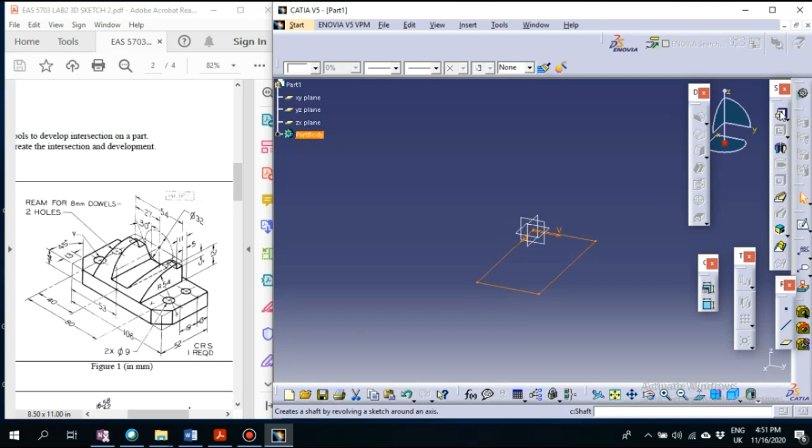Okay, the distance of vertical is 52 mm. Okay, the distance for horizontal is 106 mm. So we can extrude our pad with the height of 14 mm in order for us to get the basement of the design.

Okay, next I plan to do the hole and also the chamfer. Okay, we can start to do the triangle first. Okay, with the angle of 45 degree and the length of vertical with 13. Okay, we check the distance, length should be similar.

Okay, next we can move it to be coincide with the vertical length of the basement. Okay, we can do another one on the right side of the triangle. Okay, coincide the line.

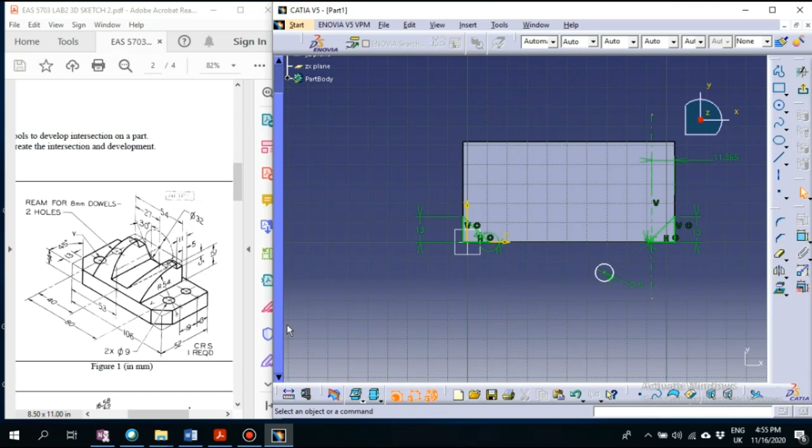Okay, the distance from the right vertical line is about... we can calculate first. It's 106 minus 80. So we get the distance of the circle, but we want it to be... so it should be divided by 2. So we have 13 on the right side, 13 from the left side.

So we can do the horizontal axis line. Okay, this method is preferable for us to determine the correct location of the center of the circle. It's much easier to have an axis line as our reference.

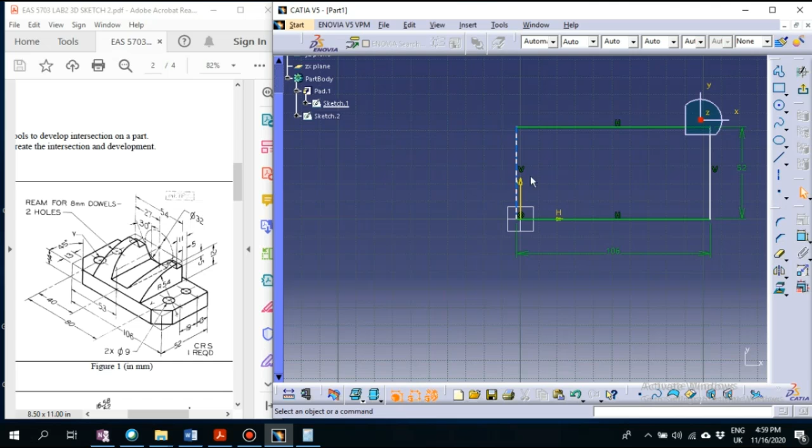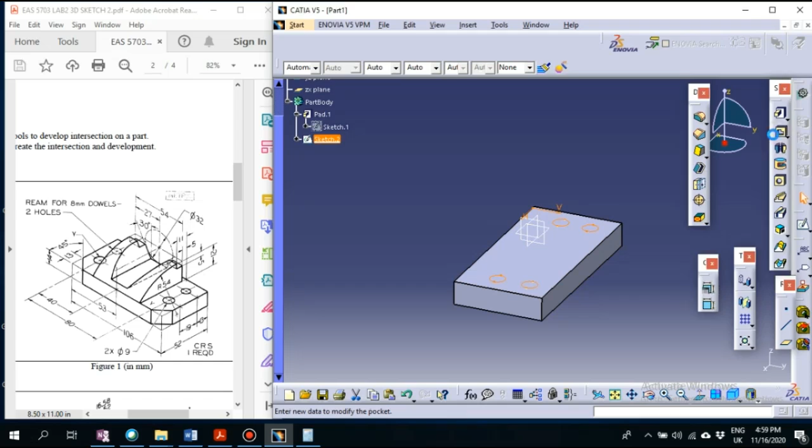Okay, what we do is, you can see on the left side there is a tree of your method or action. So you can select which sketch we want to edit. Now we will select sketch number 2. So we will delete the triangle, so we can focus on doing the hole. Okay, that's pocket. Okay, so we have ream for 8 mm dowel. We select 8 mm there.

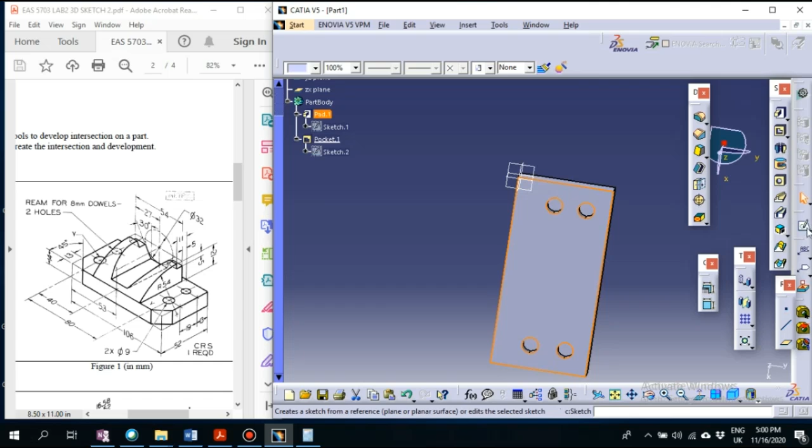Okay, done. Okay, here is the drawing of the circle, the hole. Okay, so now next we will do the triangle, cutting triangle. We need to redo it. Okay, 45 degree and 13 length.

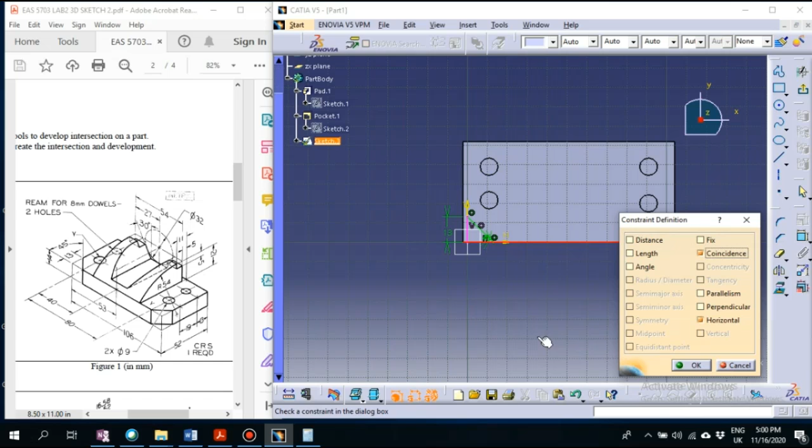Okay, we can move the line. Okay, the line is not attached to the vertical line. Sometimes it happens this way. What you need to do is just redraw it and do the coincide. It's much faster rather than troubleshooting it.

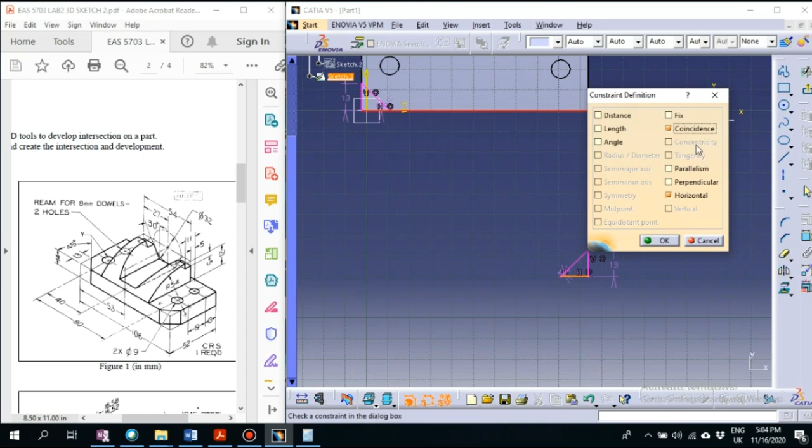Okay, now we notice there is some constraint here between these two, so it's easier to redraw it. Make sure there is no constraint acting between this design, this line. Okay.

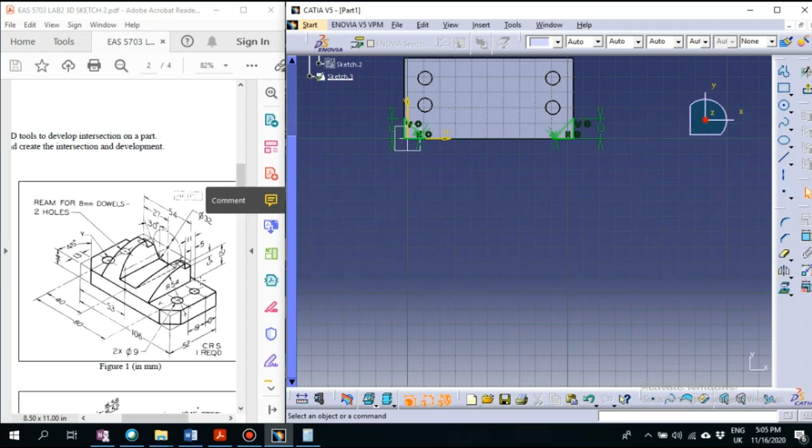Okay, now we have both sides of the triangle, so what we need to do next, we can do the cutting of the surface by selecting the pocket. So we can select up to last. Okay, so now you can preview and you have this bottom side.

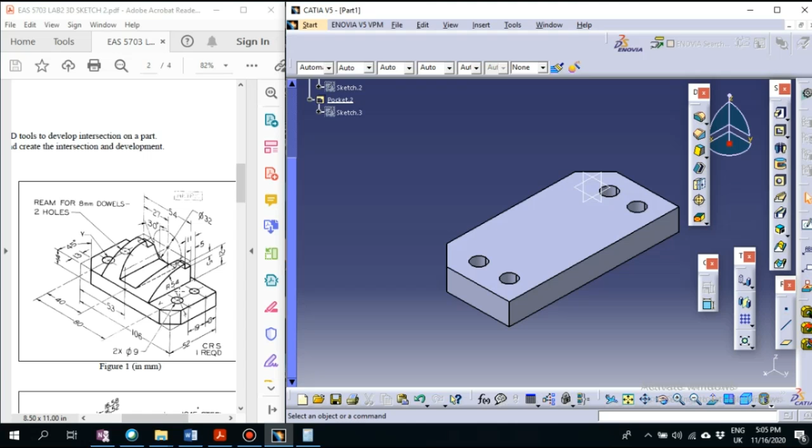Okay, next we will start to draw the upper part of the solid drawing. So first of all, we need to draw the axis line based on the center line. Distance about 53 mm. Okay, so we can start to do a rectangle, with vertical line of 47 mm and horizontal line of 54.

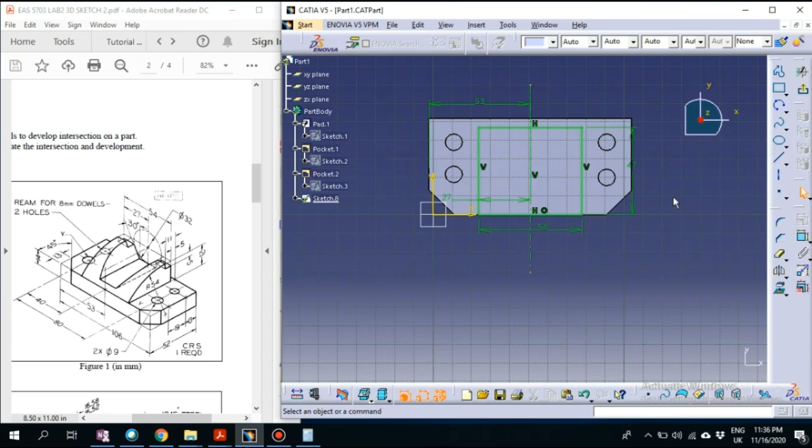Okay, then we coincide the rectangle and distance from the center about 27, and the horizontal line we will coincide it to be located on top of the basement. Then we can start to pad with the height of 21 mm. So we have the combination between the bottom and the top surface.

Next we will start to do the cutting, okay, the pocket. So here we will start to draw the main shape of the top design.

So we can start to draw the placement. We can use a continuous line, it's much faster and easier. So we can draft the shape.

Okay, so next, as usual, we will put the dimension, which is horizontal dimension is about 47. Okay, the vertical is about 16. Then the horizontal is about 6. Okay, 6 mm.

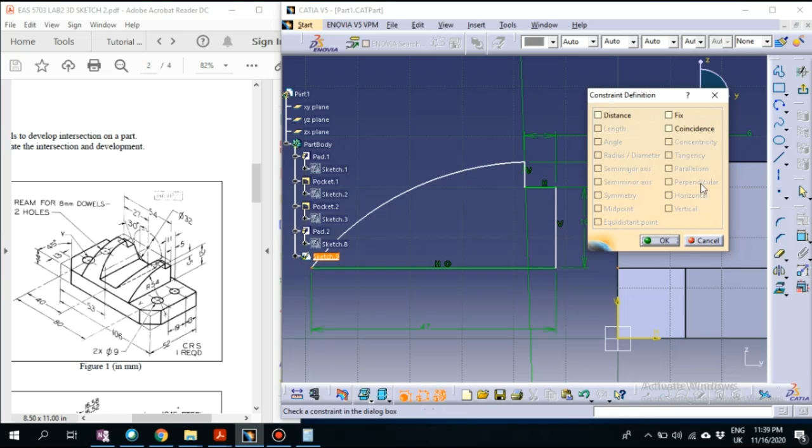So next we can do the trim. Okay, now this design will be the main design that we want it to be on top of the part drawing. But one thing you need to remember, in CATIA, it will be the method. One of the method is, if you want to pocket the design, we need to draw which area that we want to pocket. So here the idea is we put first the design, the main thing, in order for us to finalize the design of which area that we want to eliminate.

Okay, so now we need to make a design of area that we want to eliminate. So means the green design is our reference design. So now we want to eliminate area. This is the final one. So we can start to do the design, the line. Okay, then we can trim which area that we don't want it to be. Okay, now we have the area that we want to eliminate.

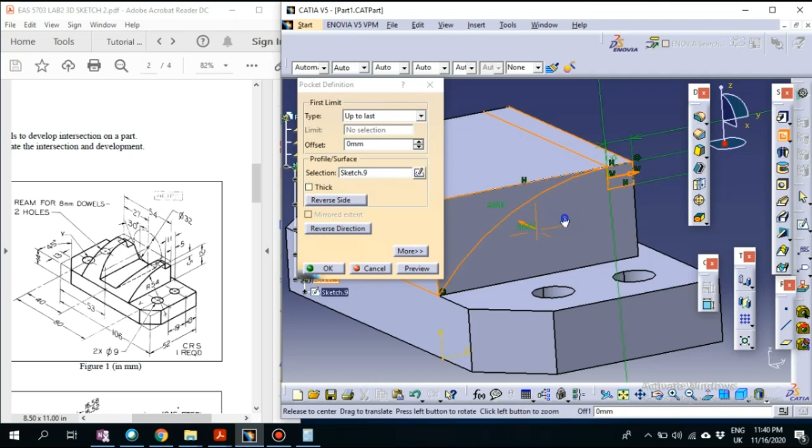So next we just complete the line, make it a close line. Okay, so once done, we just select check, and then select the pocket. So select the pocket, then we can go for up to last. Then we get the top of the design.

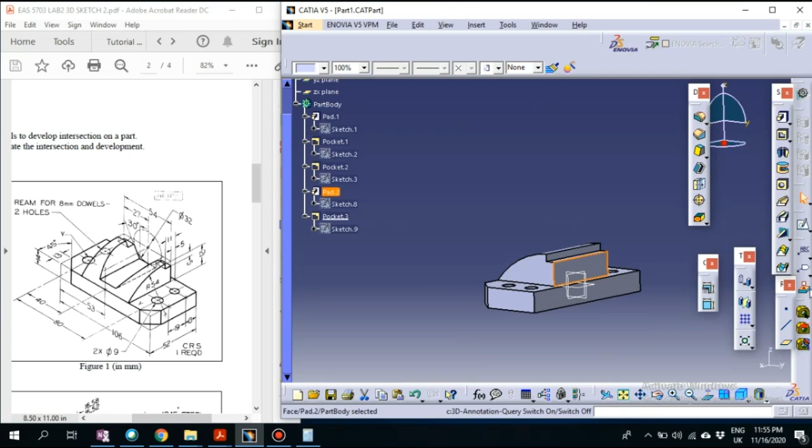Okay, our next idea is to cut the middle part of the part drawing. So we will select which area that we want to be the focus point or reference surface to cut the circle. This, okay, so select the face. We are taking the behind, or back view. So you will notice there is a combination of two cuttings, which is one is the circle with the diameter of 32, another one there is a line of 30-degree angle.

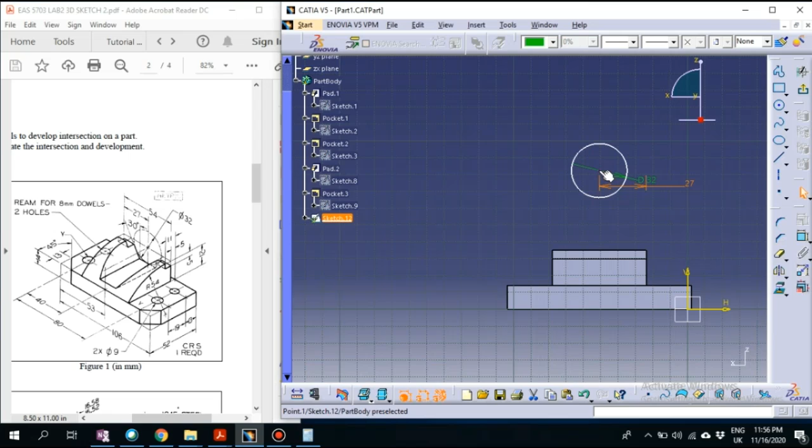So what we need to do is, first we need to do the circle with 32 diameter, then we can allocate the circle at the correct location. Okay, here is the center of 27, then the center of the circle should be at the top line of the design or the part.

Okay, so now we want to do the line of 30 degree. So first of all we can just do a triangle there. Okay, so we can put the angle which is 30 degree. So we can move, but to be more accurate we use the similar concept, coincide the line with the line of the surface.

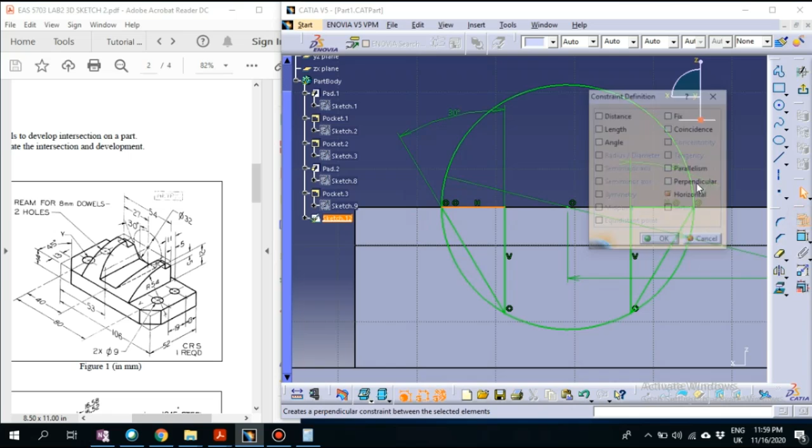So just select the line and coincide it, so you will get automatically the correct distance. So do it in the left and right of the circle. Then just coincide the line. Okay, so we have the correct one. So we can start to trim which area that we don't want it to be. Okay, there is another line that we need to do, which is the line at the bottom area. Then next we can just continue to do the trim.

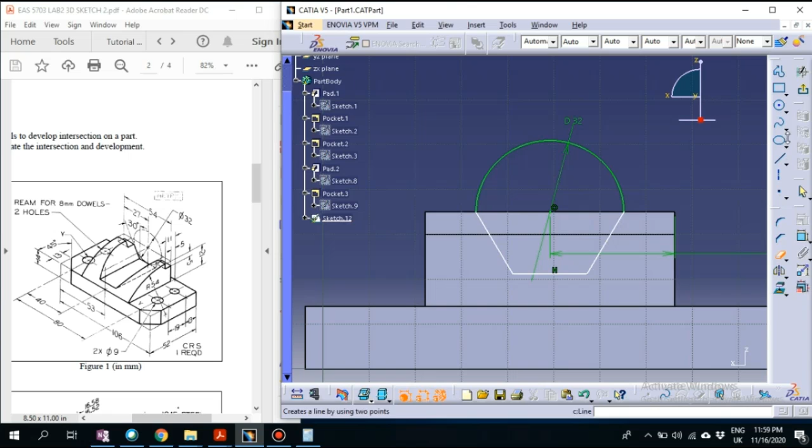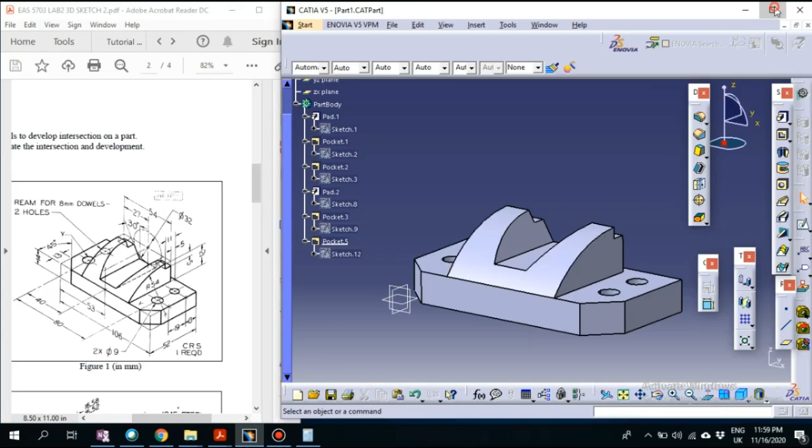Okay, so we have this shape, semicircle, and also some rectangle line. So next we just pocket it to the end of it. Okay, so now we have our final design of the drawing. The most important thing is you get the technique on how to do a 3D model for a little bit challenging drawing of these part designs.